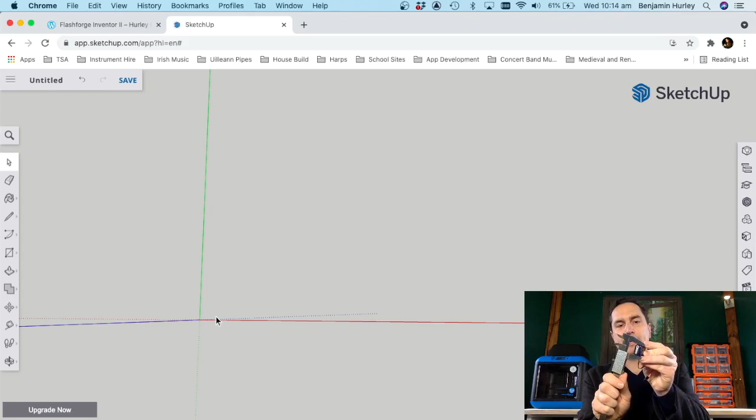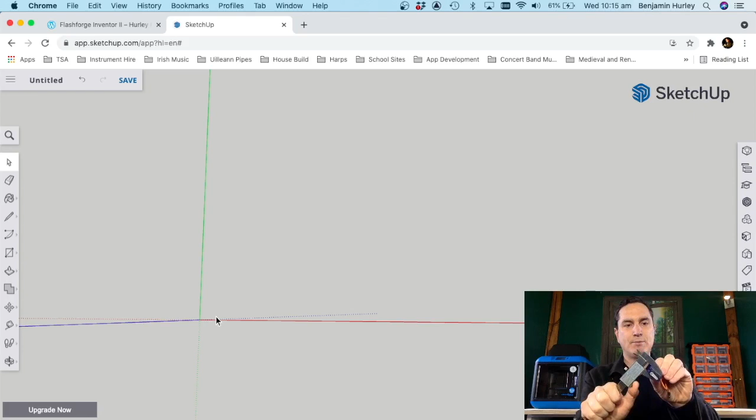The length of the horn was 20 millimeters. I'm going to put 2 extra millimeters on either side for a bit of thickness. The thickness this way I made the same as the thickness of the servo motor, which seemed like a good idea, so that's 12 millimeters that way. And this was 20 millimeters plus 2 lots of 2, so that's going to be 24. Those are nice round numbers, so 12 and 24 is like a 1:2 ratio.

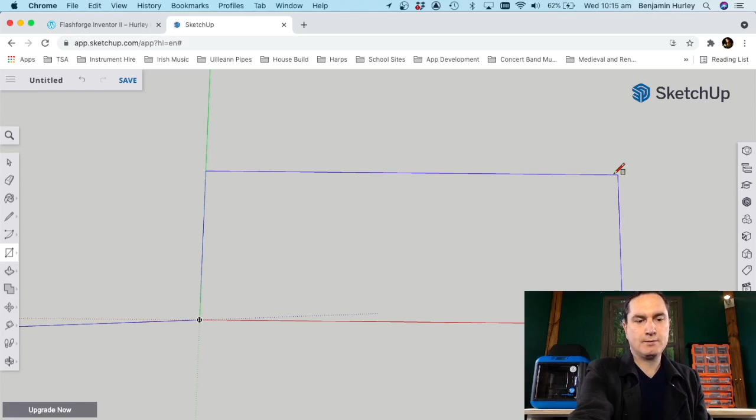So let's go like this. We need to type our long dimension first, we can see down in the dimension box it's giving us the long dimension first. So before we click, we just type 24, 12, enter, and that gives us our outside dimensions.

Now I've got a couple of rounded edges on here, so instead of a square box on each end, I'm going to turn it into a half circle. I need to mark over here with a guide where the radius comes over. This is going to be the diameter of the rounded edge, and we only want half a circle to come down this way — it's a full circle this way, and a half circle this way.

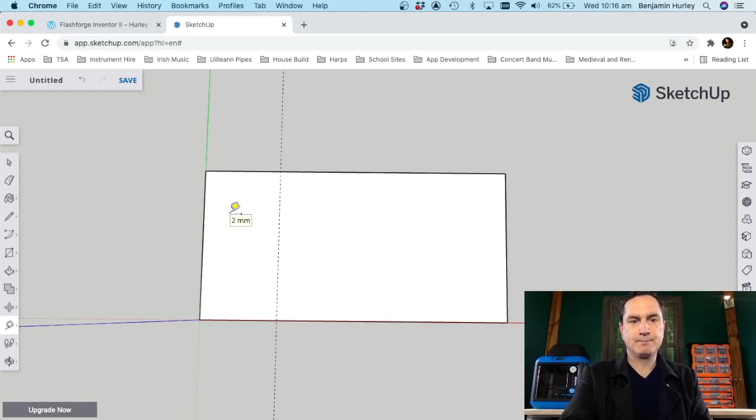That was 12, half of that was 6, so we type 6, and we'll do the same on the other end, come in 6. We have a special tool for doing radiuses — we've got this one, I don't know why it's saying unblock plane. A 2-point arc is what we want.

So we do our 2 points like this — we click on that point, and we click on that point. Now see how that, before I click, turns blue? It's always going to want to try and do something clever, it wants to do a half circle, which is what I want. I can click there, and if I'm happy with that half circle, I can just click again straight away, and it'll plonk in the half circle.

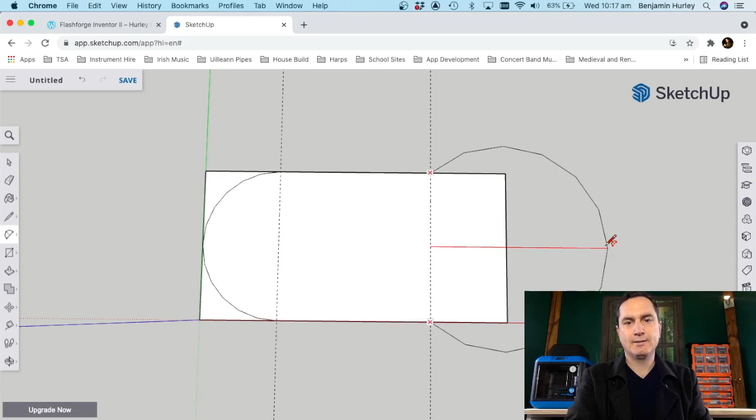If I wanted a squished circle instead of a proper half circle, I could do it this way — click 1, click 2, and drag out my arc to do a shallower arc or a bigger arc. See how it's doing part of a circle? But it just so happens I want to line up with this line right there, so I can snap there.

That's probably an easier way to see why it was a 2-point arc, wasn't it? Anyway, click on this side, click on that side, and then we can drag out and click where we want it, or if we're happy for it to do that automatic half circle, we can let it do that. Now I'm just going to erase all these lines that I don't need, so that my part has nice rounded edges.

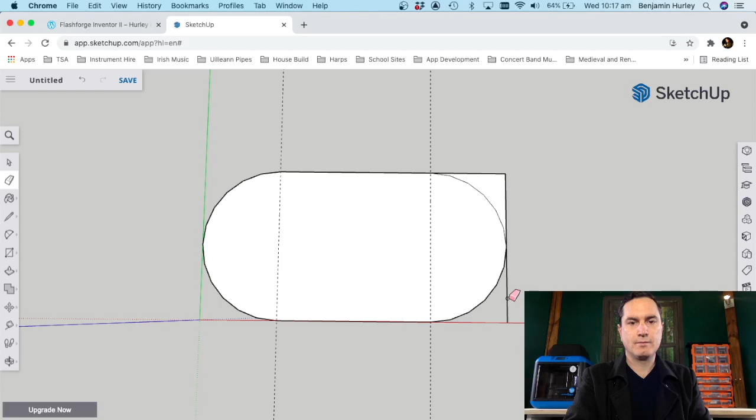Okay, very nice, right, so here we go. Now I'm just going to go ahead and delete those guides. I need to select them in a right to left direction — I think it doesn't matter if you go up or down, but if you go right to left, it selects wherever it touches.

Now I need a couple different guides. I'm going to come up here and do a midpoint — there we go, it's giving me 6 millimeters already, that's what I want. And I'm going to come over 2 millimeters there because that's where my horn starts, and give myself an edge there. And I'm going to come in 2 millimeters that way too — you'll probably see why in a minute.

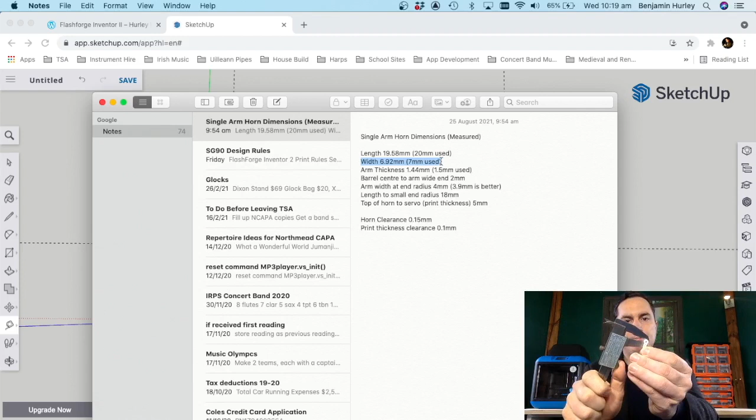Now for our barrel part of the servo horn, the diameter of that circle part was the same measurement as the width measurement. If we bring up our notes again, the width we measured was 7 millimeters, measured that way, but it's the same measurement as measuring just the barrel part this way. So we know our barrel diameter is 7 millimeters.

That means we can come over and find the midpoint of that circle at 3.5 millimeters, and that gives us our midpoint.

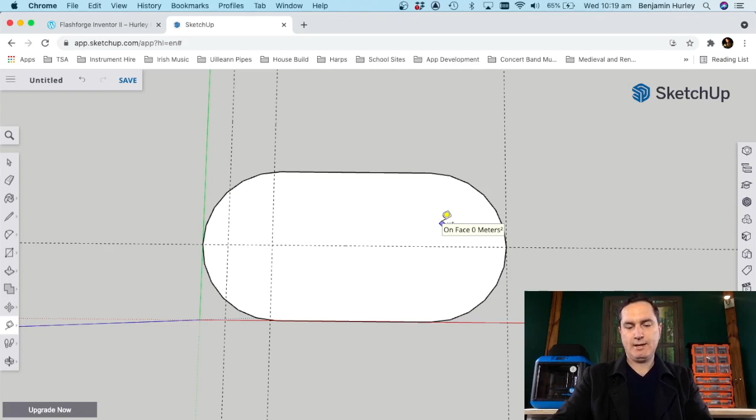And, ooh, no, I've done something a little bit silly. I started to draw my detail on the base of this servo horn. Got to watch out for that. So I actually need to delete all these lines, and extrude it first, then do my details on the top.

Before we go any further, that base there, that flat plane, is where you would want to design the shape of your attachment. If you want to do something different, like a pointy arrow or a little hand or anything like that, do it when you're at this stage first.

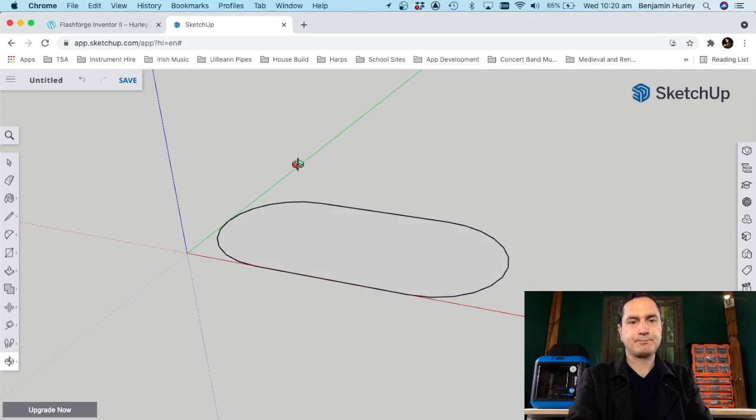Then extrude up the whole thickness. We're going to make it easy. I'm going to do 5 millimeters first, and then bring it back 0.1 millimeters, and check what I've done.

It should be 4.9 millimeters. Down in this length box, it gives me my answer, and you can see it's saying it's about 5 millimeters. That's not very good, is it? I don't want it to tell me it's roughly about 5 millimeters, I want it to tell me exactly what it is.

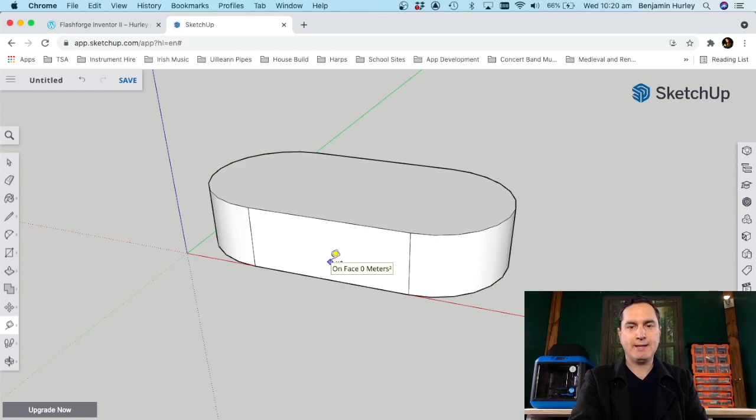That's just saying that - I mean SketchUp, sorry, it's not Google SketchUp anymore - SketchUp knows exactly and precisely what it is, but it's displaying it to me rounded up to whole millimeters.

So if I want it to show me more precisely, I want to use more decimal places. I'm going to click on this entity - well, this is model info. Here I can change it to inches or millimeters, and I can change the precision.

At the moment it's set to whole millimeters, but I'm going to be using a 0.15 mil clearance, so I want 2 decimal places precision. So it's going to give me 2 decimal places.

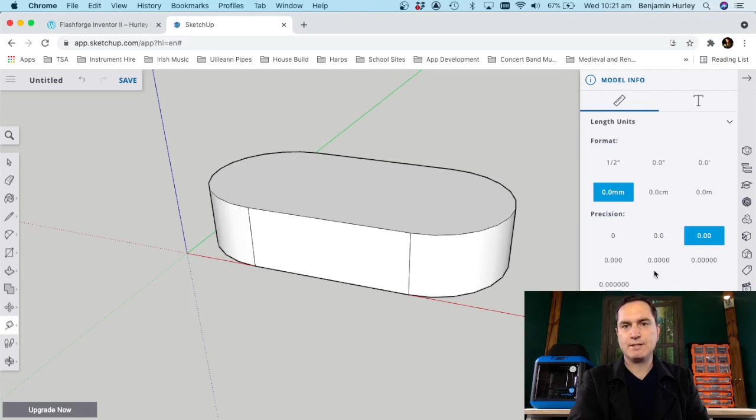Okay, let's pop that back away. Measure again. Boom, 4.90 millimeters. That's exactly what I needed it to be.

Right, now we're ready to go back and draw our servo horn shape onto the top face. We need the full thickness, and then we're going to think of it like we're going to cut the servo horn shape into the top.

So let's get our guides back. Let's get an end guide at the end there, and we'll come in - I'm going to make sure it's following the red axis there. Come in 2 millimeters, that's the edge of the servo horn there, and then come in 3.5 millimeters to the middle of the barrel.

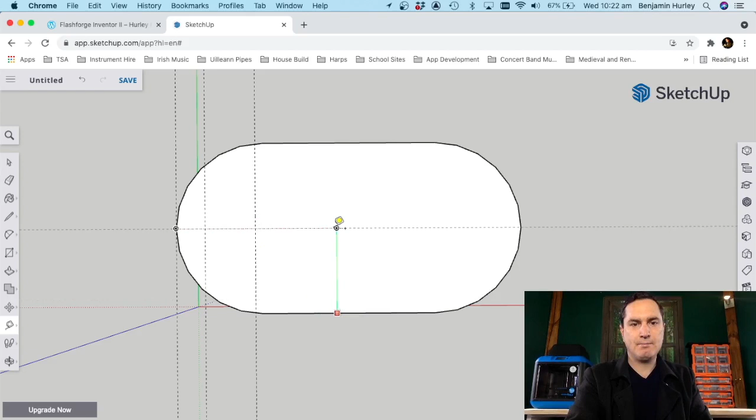Put my center line back at 6 millimeters. That gives me the middle point. Now I can go ahead and draw my circle with my circle tool - should be under the... no, it's under the rectangle tool. That's right. Boom, boom, boom, boom. Circle.

Very good. Now I also need a guide to tell me where the arm starts, about here, and then where it finishes down over there.

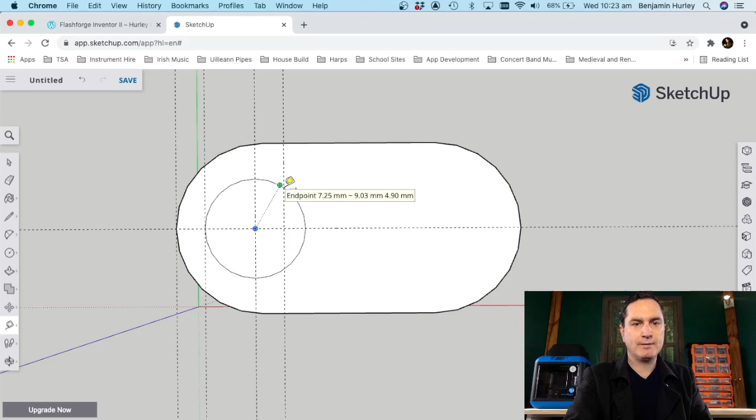Where were my measurements? There's my measurements. So the barrel center to the arm wide end is 2 millimeters. That's the center of the barrel, we go over 2 millimeters, and that gives me that point there where the circle meets that guide, and that's where the arm is going to come up to. It's going to come out like this, and come over to here.

What was that measurement again? The length to the small end radius is 18 millimeters. So the overall length from back here - oops, see how that snapped to somewhere, so that wasn't going to give me a line. We'll have to be a bit careful.

See how this guide here is very close to the green axis - I don't want to do it there, I might accidentally get the green axis. I'll go down here, make sure I'm following the red axis, and make that 18 millimeters.

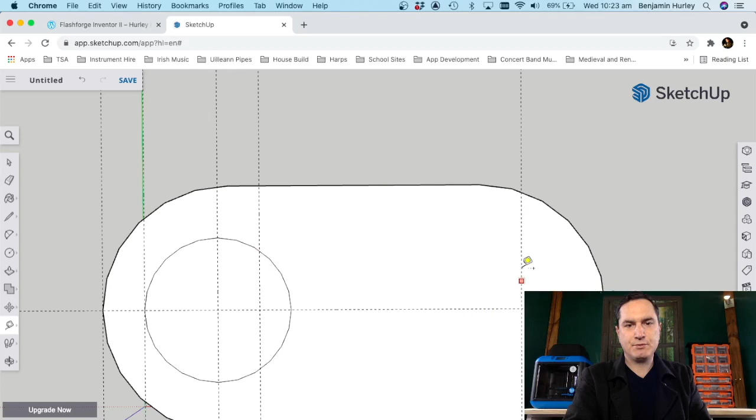Okay, now that line there is to where the straight line part of the arm goes to. Now I just need to remember the width of the horn over here, and I believe that was 3.9. Yep, 3.9. So what's half of 3.9?

I'm not going to trust myself to do maths in my head, so let's get a calculator. 3.9 divided by 2 equals 1.95. I'm going to mark a 1.95 guide there, and a 1.95 down there. I could also have gone from this one and gone 3.9 instead - that would have been the same thing.

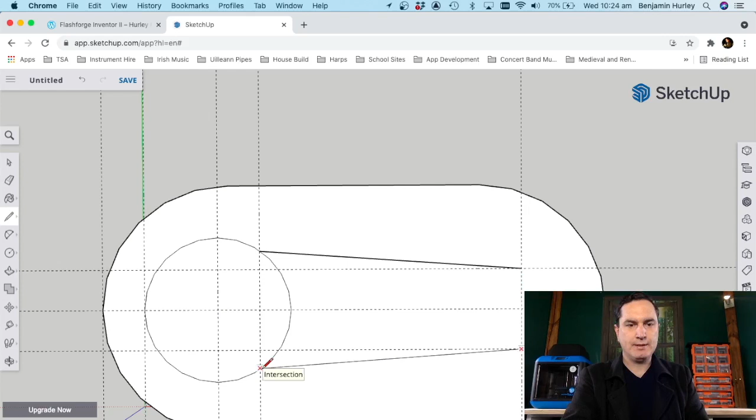Now I just need to draw some lines from here, where that line meets the circle, down to that intersection there, and the same on the other side. Let me get a pencil. Watch how it likes to stuff around and try to give me the wrong one - I'm going to make very sure that I've got the X right where that intersection is. I'll draw my line there, hit escape so I don't want a straight line that way, then draw a separate line going to the intersection, and hit escape again to stop drawing.

Now I'm nearly done, I just need my little radius here. I'm going to show you a neat trick with this arc tool - you saw how it automatically wants to give you a half circle.

We could do a half circle, but it's smarter not to, because when we were doing it on the outside edge earlier, we were going to a straight line, and that's giving a straight line at 90 degrees where the angle of the circle meets it - we call that tangent. That semicircle, right at the middle point where it's coming up, and that straight line coming along there, that is tangent - at that meeting point, the line and the circle are at the same angle. They match each other.

So we could do just a semicircle, but over here it wouldn't match - see how that line is going slightly up? To do a semicircle, the line would have to come straight off to match the angle, to be tangent.

So SketchUp is pretty clever. If we go down and click - well, I haven't even clicked yet - see how the arc has gone purple and it's saying tangent at vertex. This arc isn't a semicircle, it's not a full half of a circle. It's the part of the circle that matches, and it's going to come around following the angle where this straight line meets it, so that circle naturally fits much better to the angle of those two lines.

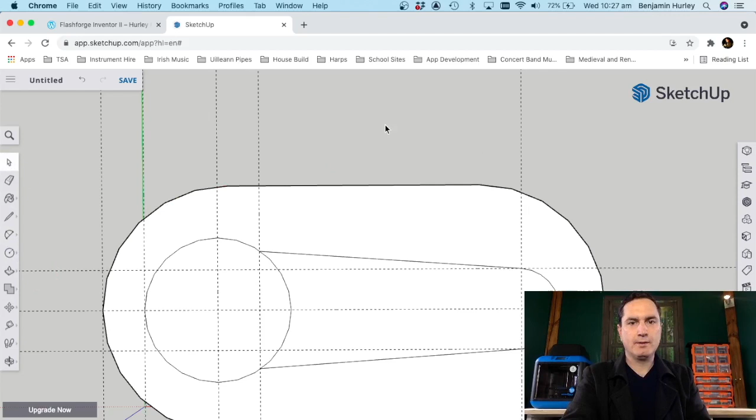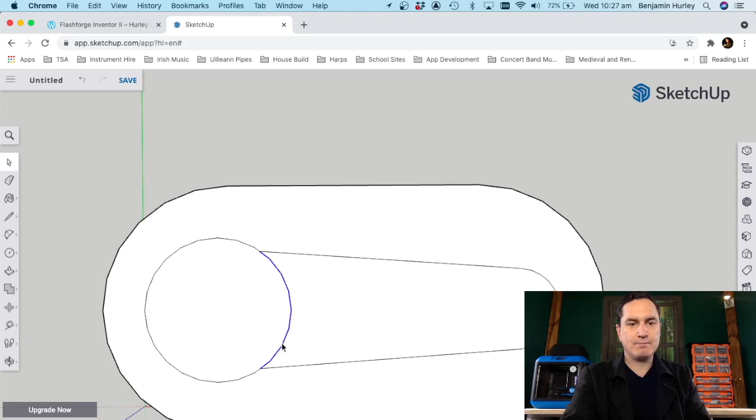Alright, let's get rid of all these messy guides so we can see what's going on a bit better. Now we're nearly done. We want to change this - it's currently the exact same dimensions as the horn, but we don't want that, we want to push it out a little bit bigger. So I'm going to get rid of this part of the circle to make it one shape, and give myself a bit of a better perspective.

We're going to use the offset tool - there it is, underneath the push-pull tool. We're going to click on that edge, and push it out. Before I click, I'm going to type 0.15.

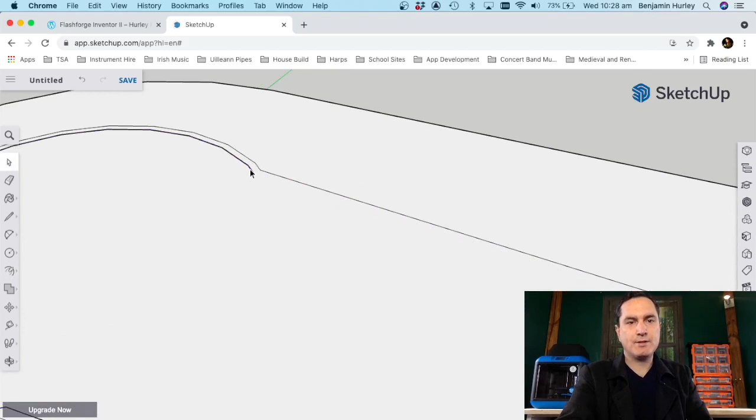That gives me that outside line, which gives me my clearance, my 0.15mm clearance. Now I can just go around and delete all of the inside lines that match the horn, and we can use the slightly bigger shape with our nice 0.15mm clearance. Okay, and we're ready to cut this hole down into our shape here.

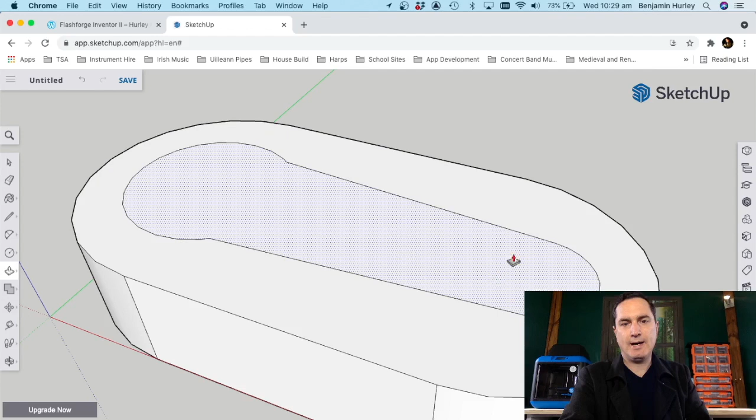So we'll grab the back underneath the offset tool. We've got our extrude tool, and the first thing we're going to do is extrude down just the skinny arm thickness part, and then we'll keep going down with the circle part. So that arm thickness, let's make sure we're correct. Arm thickness was 1.5mm, so we drag it down, type 1.5, enter.

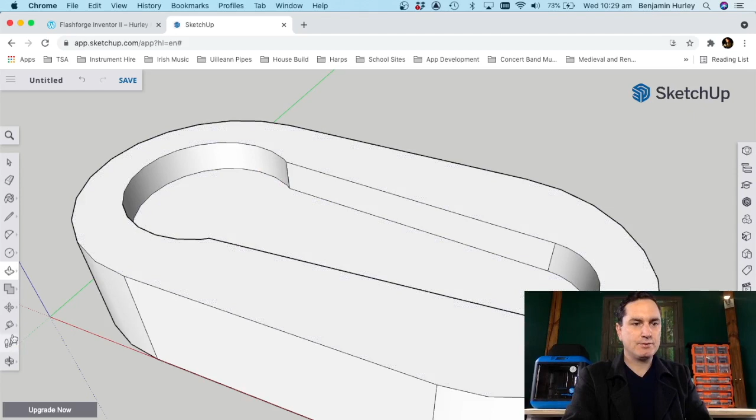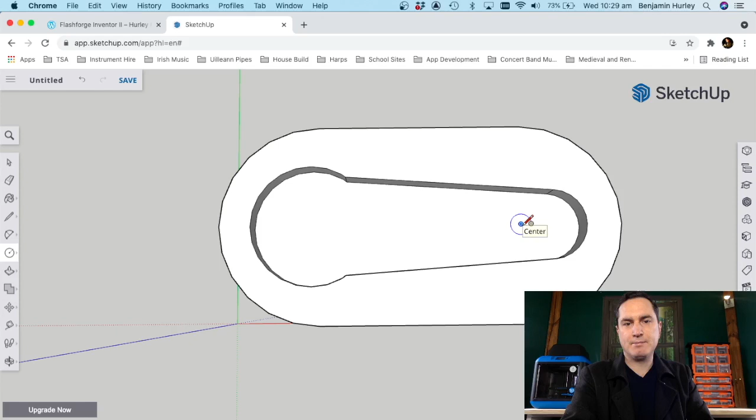Very good. Now we need to bring that part of the circle back, so I'm going to grab my swivel tool and swivel back. Now, sometimes if you're lucky, when you grab your circle tool or whatever, you can hover onto a radius and see how it gives you the midpoint, and it snaps to the midpoint. But I found that with this one, it's kind of hit or miss, sometimes it does it, sometimes it doesn't. See how it's not quite sure what angle to go here, and it's not really giving me my midpoint.

So what I found you can do is, rather than having to draw the guides out, we can hover on this one and see how it's following that top line and finding points along the left where you might like to line up to. So it's found the topmost point and the sidemost point, and that's basically found my midpoint for me.

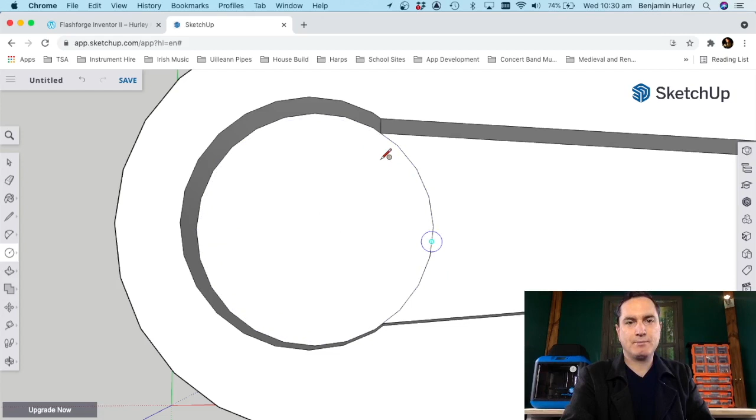So let's go out and make sure this looks like it's following that circle nicely. So I click there and I've got my part of the circle back. Very good, and we'll angle back.

And now comes another neat trick. We don't have to worry about what distance this is to make it meet up with the edge. We can use that trick where we snap to another edge. So if we start extruding this bit, and if I come down and line it up with that top edge - I don't want that, I want to line it up with the bottom edge.

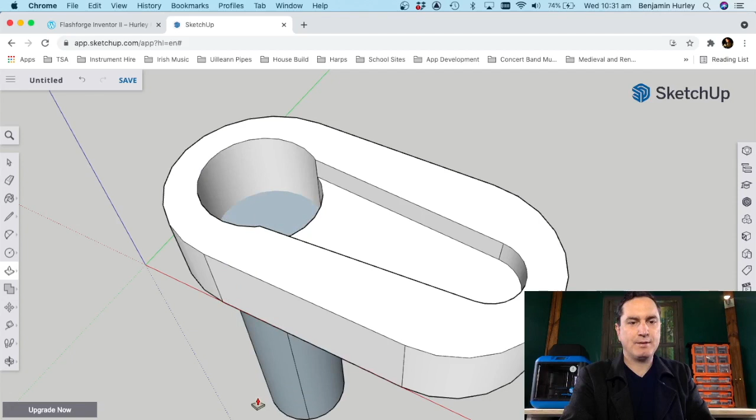Down here so that it goes exactly all the way through and doesn't keep going out the other end. See, that's too far. I want it to line perfectly with that edge, and then that completely deletes it. You can see it's not a model there anymore - it's a hole going all the way through, and that's exactly what we want.

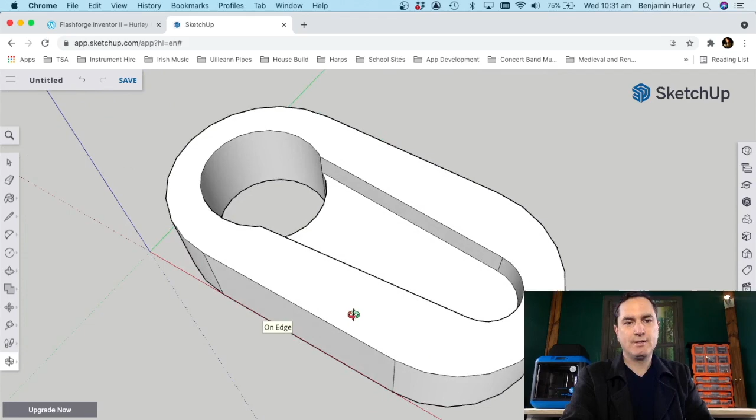So there we have it. That's our little tester shape with a perfectly sized servo horn shape cut into it. That will go all the way through so that you can assemble that and stick the servo horn into this print first.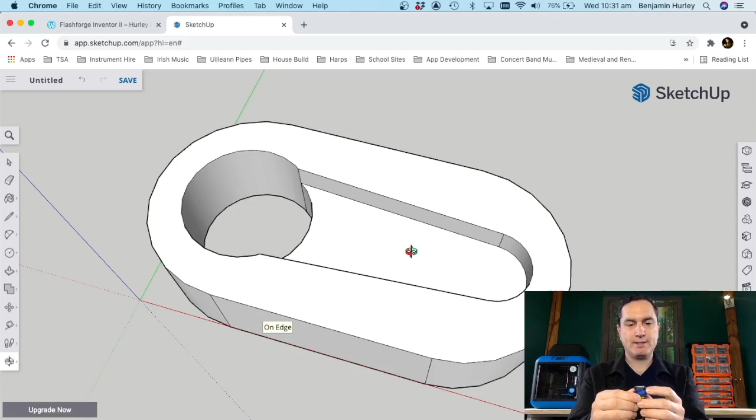And then together you can put that onto the servo and then screw in your little screw, and because that's a nice snug fit and the thickness is just right to press it up against the edge of the servo, it's a nice snug fit in there, it shouldn't have any play going that way.

Except it does have a little wiggle, but that's actually the teeth of the cogs inside there, not my print - that's the cog teeth giving that little wiggle, and it should be that 4.9 thickness, just perfect to fit between the servo horn and the edge of the servo there.

So that's all stuck in place, it can't fall out, and even if you twist it around a little bit, it doesn't have terribly much play that way either. I mean, I wouldn't use that join just like that for something that was carrying some weight, like a robot arm or something like that. But for something that points, something that moves, maybe the lid on a box or something like that, that would be really, really good. Okay, so that's how you do that.